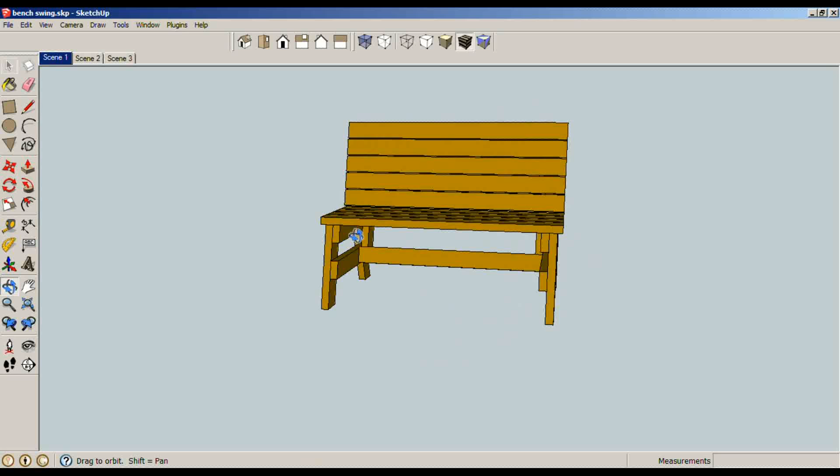Alright, this is the bench that I've been making for several years now, and it's a 48-inch bench, and I've always wanted to make this into some type of porch swing. I really like the angled legs. I don't really care for straight legs or straight arms. I really like the angled look, and 15 degrees is perfect for me.

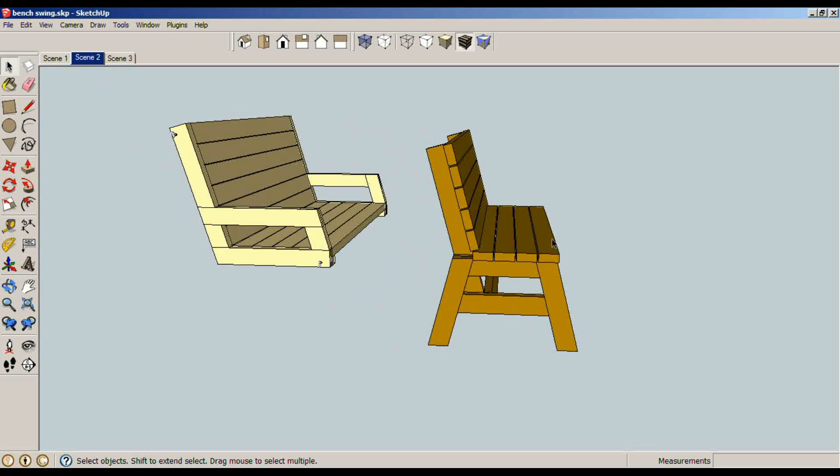So recently I was asked to make a swing, and I figured it'd be a great time to do so. So this is what I've come up with. It keeps the same 15-degree theme going. I've added an extra slat in both the front and also the top, and of course I've got 4 eye bolts to suspend this from the porch.

It's all half-lap construction, and it should be a very quick, very easy, very budget-friendly project. So stick around and I'll show you how I made this in SketchUp.

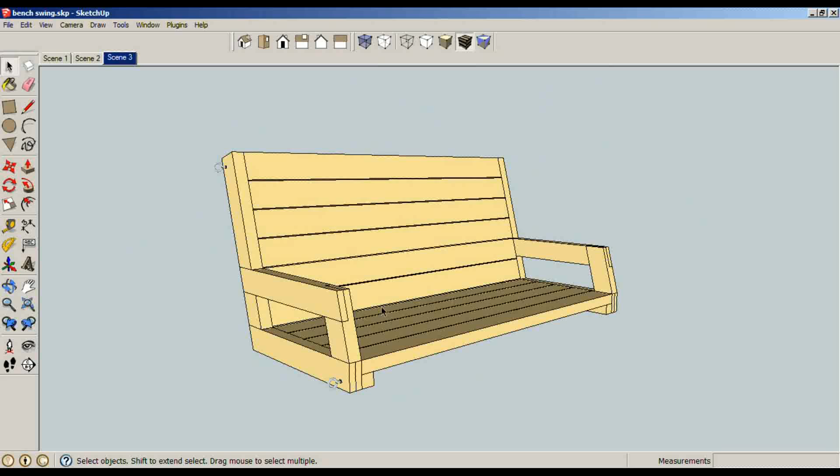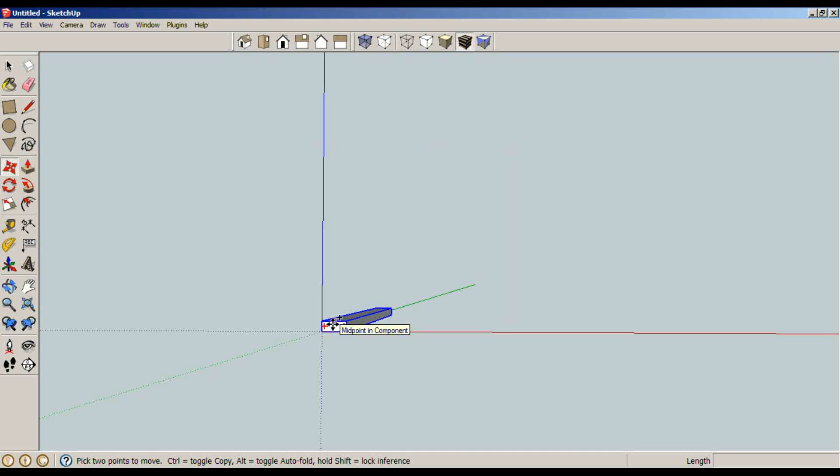Alright, I'm going to start this project with the slats. So R for rectangle from the origin, and I'm going to go 3.5 by 1.5 for a standard 2x4. P for push pull, this direction 48 inches. Space bar, triple click. G for component, enter. M for move, Control brings up your plus sign, and I'm going to go from this corner along the red axis 3.625. That allows the 3.5 inches plus 1/8 of an inch spacing. And I'm going to press X 4, enter, which duplicates this copy times 4.

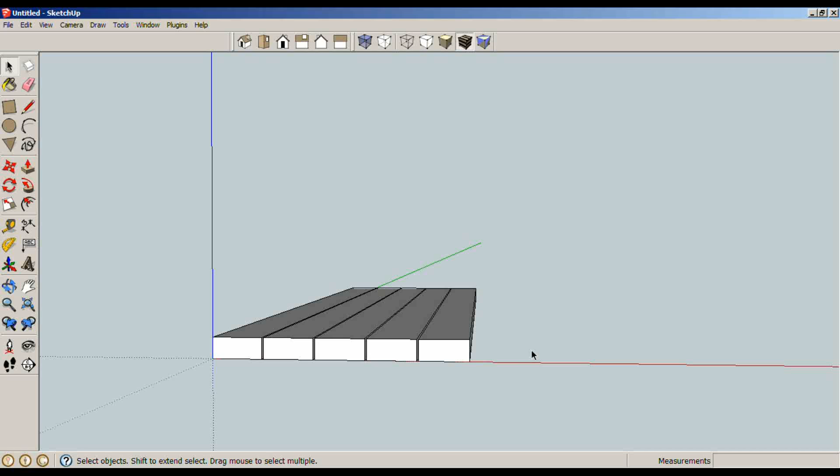Now I want to make another set of slats going up the back, so let's just first select everything, rotate from this point, this direction, 105 degrees, but I'm going to press Control to bring up the addition sign. M for move, from down here to this point, and let's see, I need to move these 1/8 of an inch this way so I have a nice spacing in between. So let's go with T for tape measure, and across one of these edges I can drop a guideline which will allow me to move along that guideline

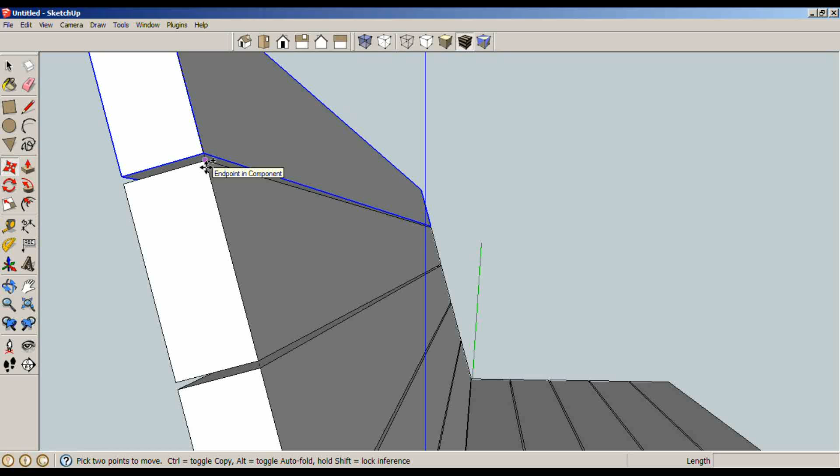0.125. I actually want to add one more slat up here, so I'm going to select it, M for move, Control brings up your addition sign, and I want to snap from this point over here. That way I keep the spacing already there. There we go. I'm going to have 6 slats on back and 5 on bottom.

So now I can build the arm, and what I'm going to do is basically use the T for tape measure to make a couple guidelines and just draw from there. So the arm pieces are going to be 3 inches wide, and let's see, I need a guide here and then go down 3 inches right there. I'm going to take both of these, M for move, Control brings up copy, both of these guides over here, grab one of these, M for move, Control brings up copy, and I'm going to go 3 plus a 4-inch spacing, so I need to go up here 7 inches.

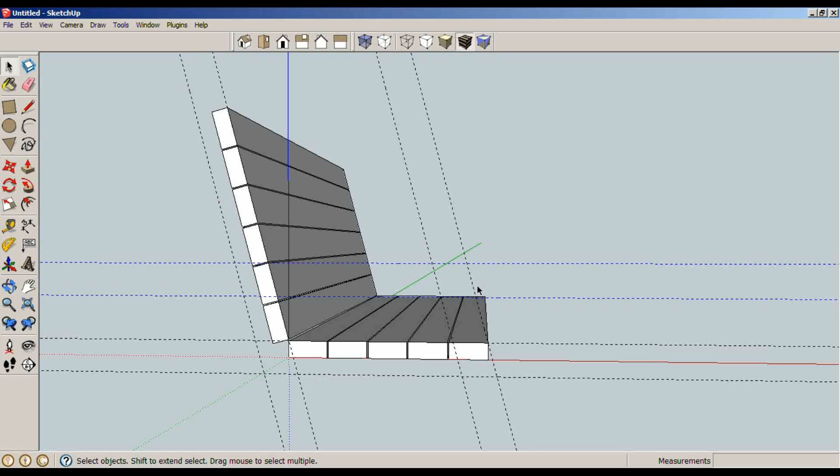Now this just outlined everything that I'm going to do, so I can use my L command to just draw in everything. This horizontal piece on bottom is just going to be flush right here. P for push pull, this direction, distance of 1.5. That's the standard thickness of a 2x4. Space bar, triple click, G for component, enter. L for line, let's draw another one right here. P for push pull, this direction, and I've already got my distance here. Space bar, triple click, G for component, enter.

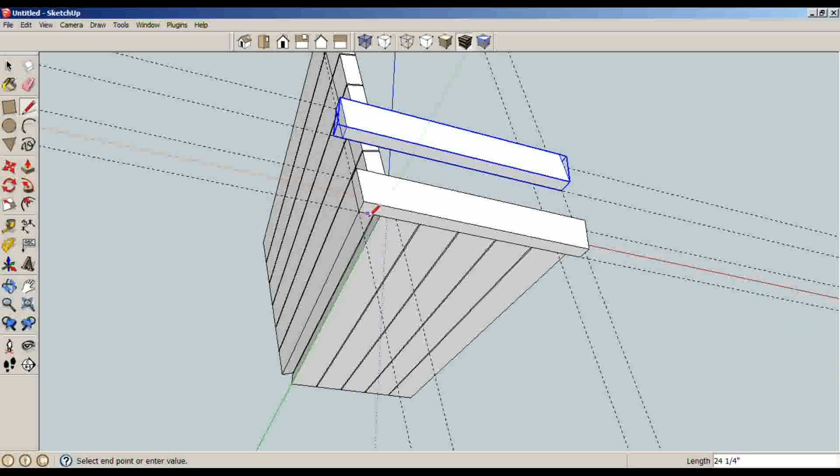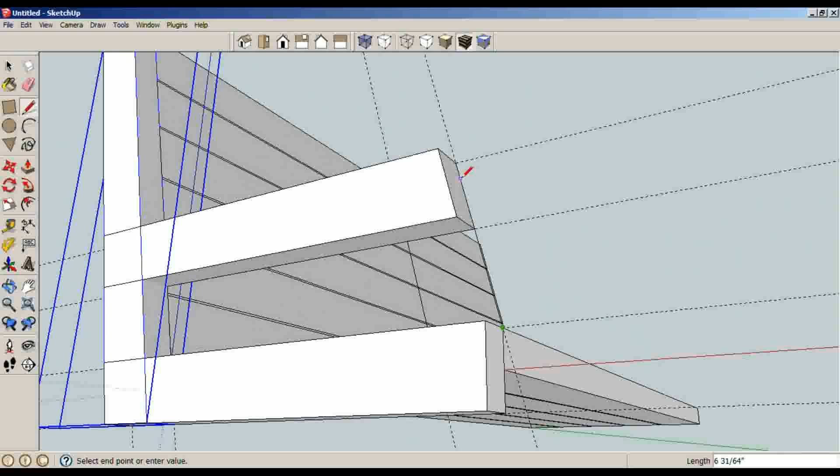L for line over here to here, just connecting some dots. P for push pull, this direction right there, spacebar, triple click, G for component, enter. L for line, and this one's going to be a little bit funny shaped. P for push pull, right there. Spacebar, triple click, G for component, enter. Now that's the arms. I just need to cut out for the half lap, so I can delete my guides.

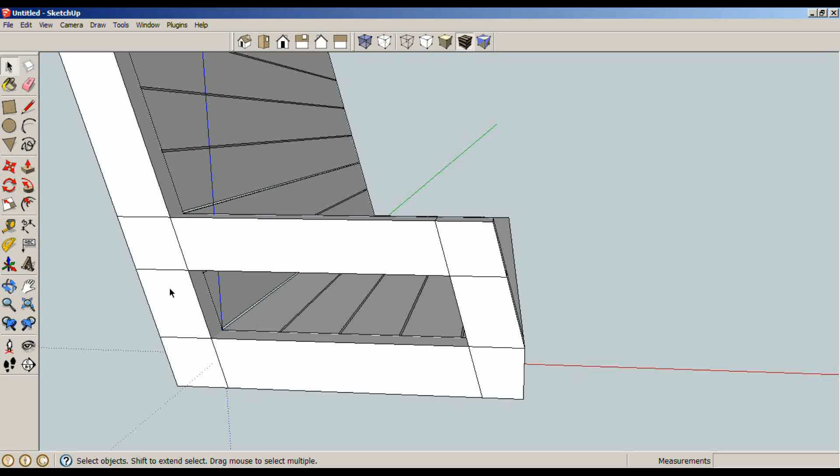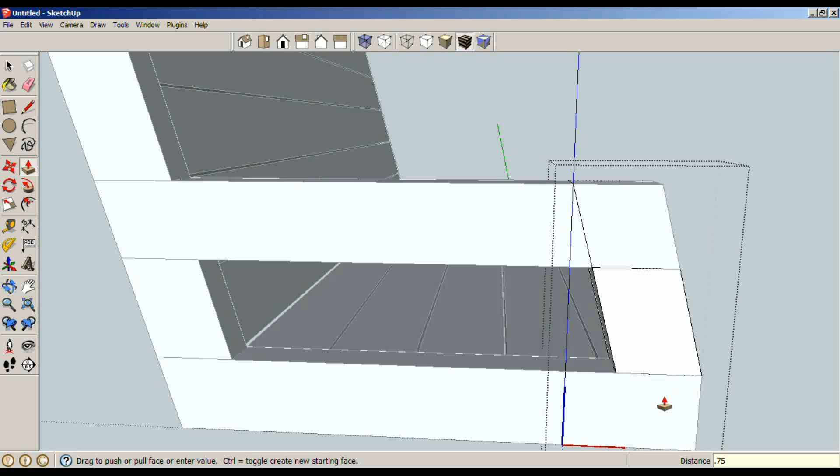And which pieces do we want to show up on the half lap? I want to see the horizontal pieces on the outside of the swing. So let's first remove the vertical pieces. So double click, and we can use L for line to just draw in these half laps using the horizontal pieces as reference. P for push pull, we're going to go in 0.75 inches, enter, in 0.75 inches, enter. Get out of that part, over here, L for line, P for push pull, whoops, P for push pull in 0.75 inches, in 0.75 inches, spacebar.

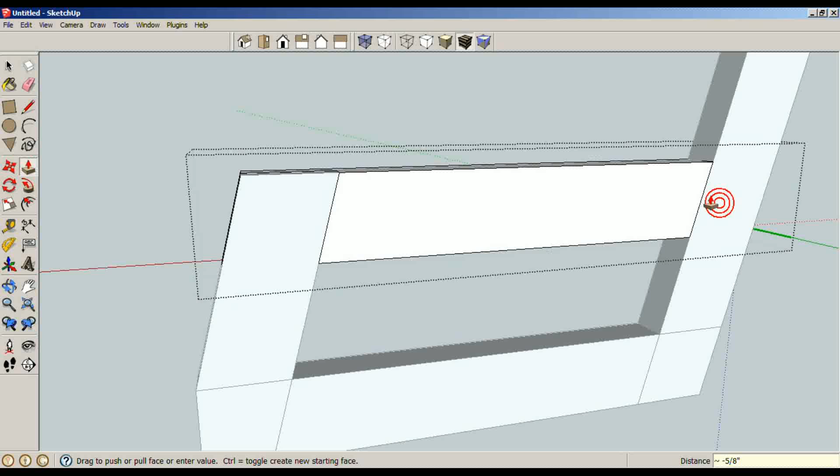Alright, now I'm going to hide the rest of this so I can see the inside. Now we pushed in the verticals on the other side, so now we need to push in the horizontals. L for line, tracing out our guides real quick, P for push pull in 0.75 inches, push this in 0.75 inches, same thing on bottom, a little bit of repetition here. L for line and trace out our little guides here, P for push pull, whoops, I wasn't in my part.

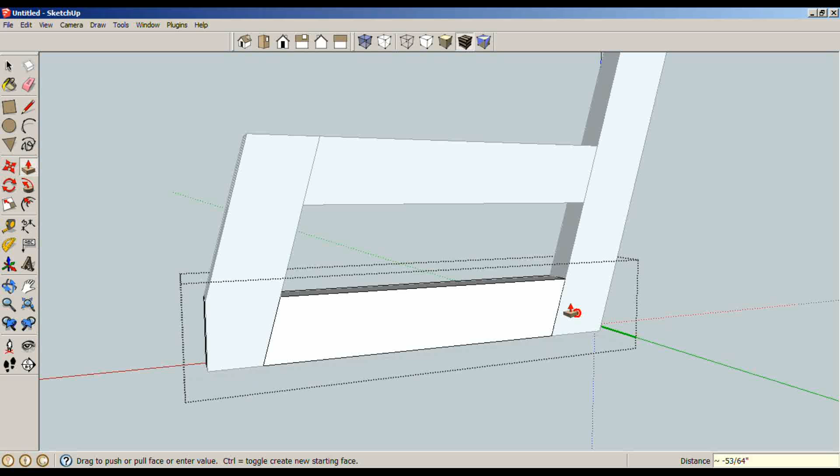There we go, L for line. P for push pull in 0.75 inches, push it in 0.75 inches, spacebar, get out of that, and now we have some nice half lap joints, as you can see.

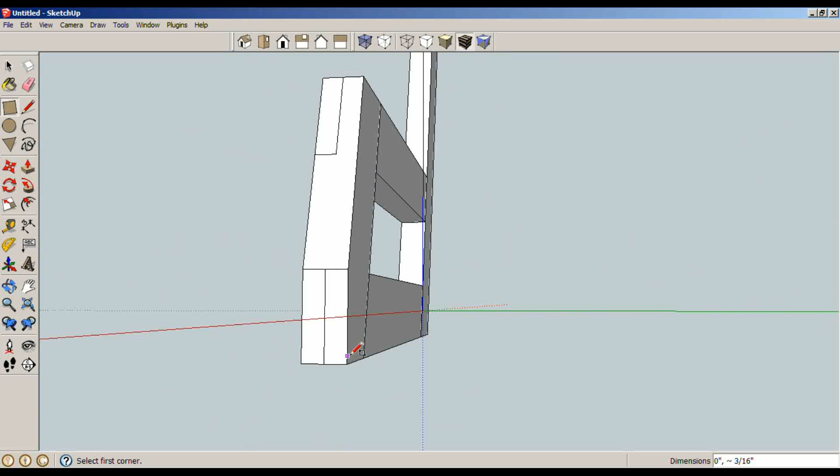Alright, so the slats need something to rest up against, and for that I'm just going to R for rectangle and make a 2x2 that I can just screw to the bottom. So 1.5 by 1.5, enter, P for push pull, and I want to go this direction. I'm not sure where I want to stop as of yet because I want to connect it to the other one, so let's just stop it right there and don't make it a component yet.

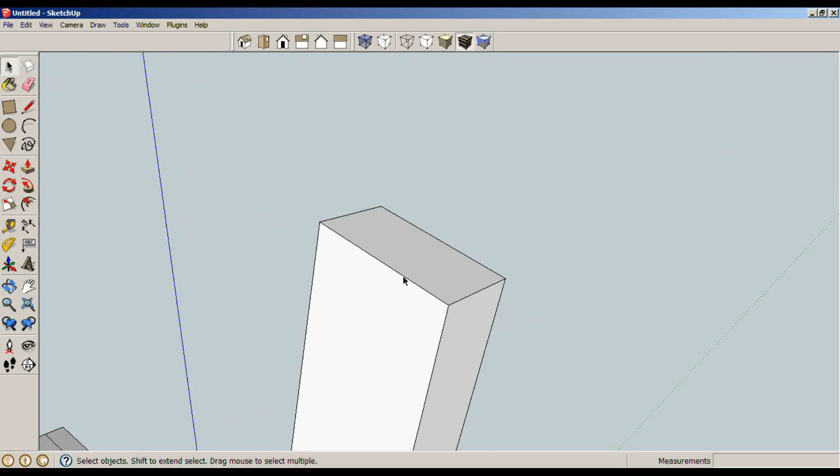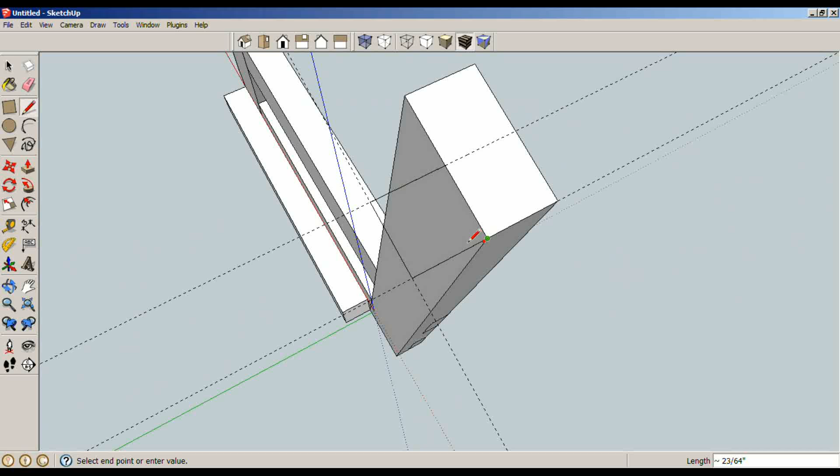So now we need to go down this way with a 2x2, and this is an angled face as far as the origin of the drawing, so I'm going to use my T for tape measure and go 1.5 this way, and along this face 1.5, and then also right here. So now I've got a little rectangle I can trace out with the L command. There we go. Let's delete these little guides real quick.

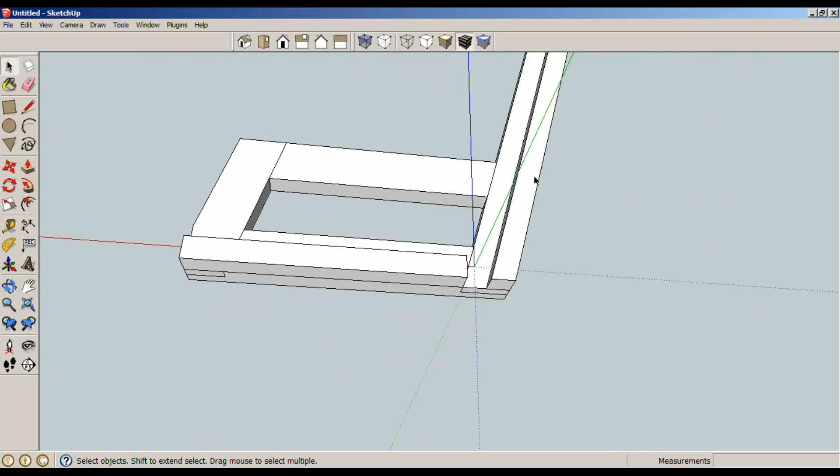P for push pull, and I'm actually going to back up, P for push pull, there we go. Actually going to go further than the piece and use the L for line command to just chop it off right at the bottom. Now I have a good mounting location for the back slats. Triple click, G for component, enter.

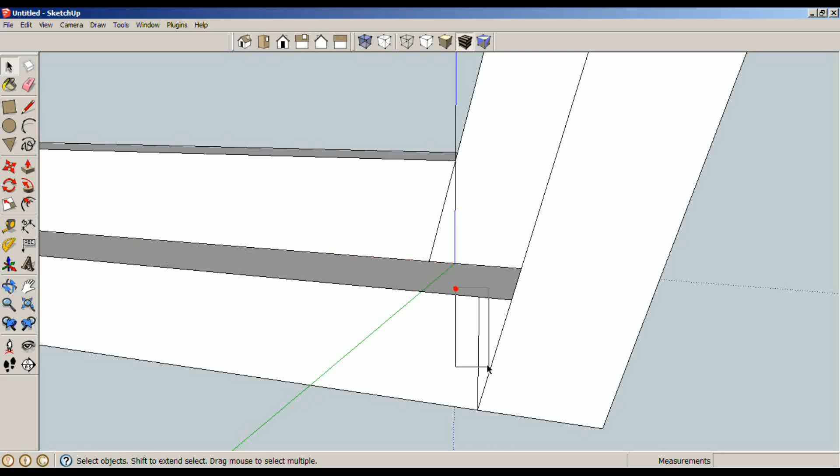Now we never made this one a component, so we can still P for push pull this face to this point, L for line, whoops, too far, L for line, connect the dots here, P for push pull, we're going to push it all the way back to this edge. Now we can delete that line. There's another line inside the part that I should delete, but no one can see it, so I'm not going to.

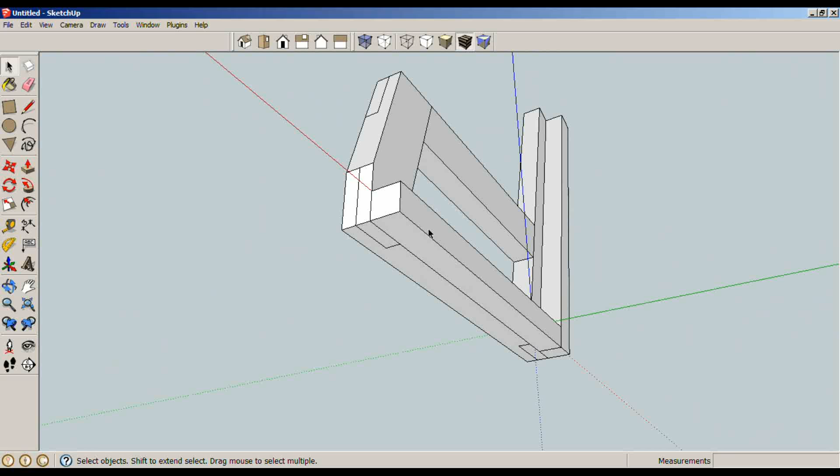Triple click rather, G for component, enter, and now we have a mounting location for the seat slats. All my seat slats and back slats are going to be secured from the bottom, so there's no screw heads on top, and these are just going to be screwed in and glued as well. So now let's edit, unhide all. Let's unhide our slats, and they fit in just as planned.

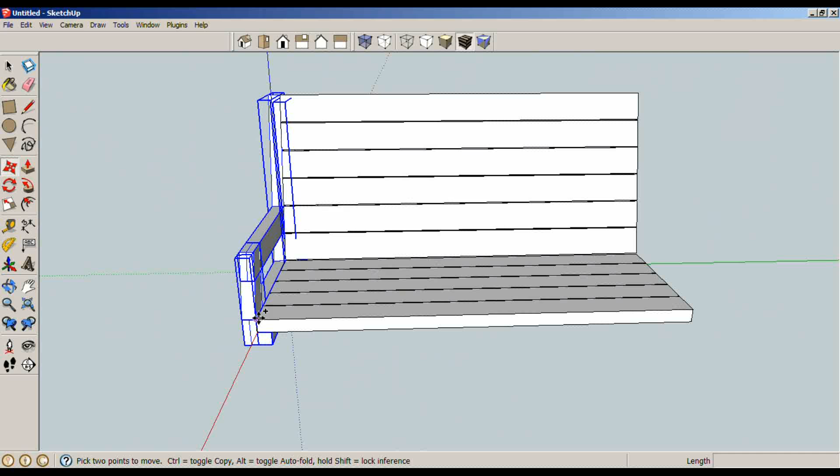So we can use a window to select just the arm assembly rather. M for move, control brings up your plus sign, come over here, and we dragged it across the green axis. It is in the wrong orientation, so let's flip it along the green direction. And that's pretty much it.

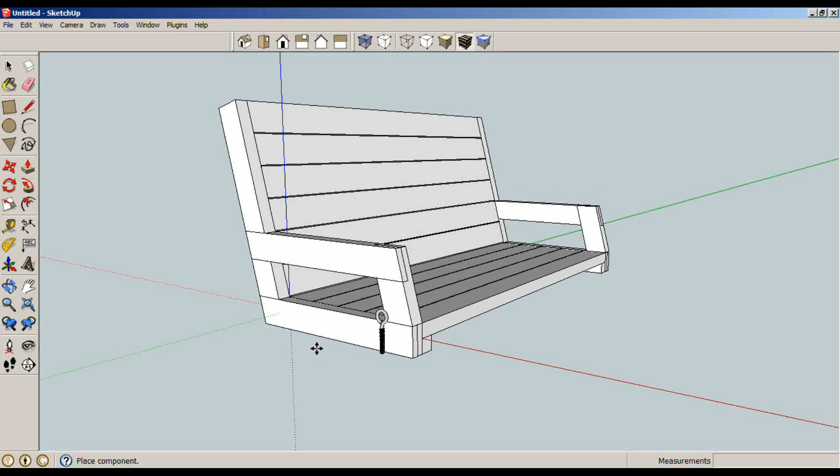There's not much else to this, although I do want to put in the eye bolts real quick. So let's go to File, Import, and I've already downloaded an eye bolt off the internet, so I can just open this and drop it in my part. Now let's rotate this so that it is in the correct orientation. Let's go like so, and let's go like so. M for move, I'm just going to grab it on the piece somewhere, and drop it like that.

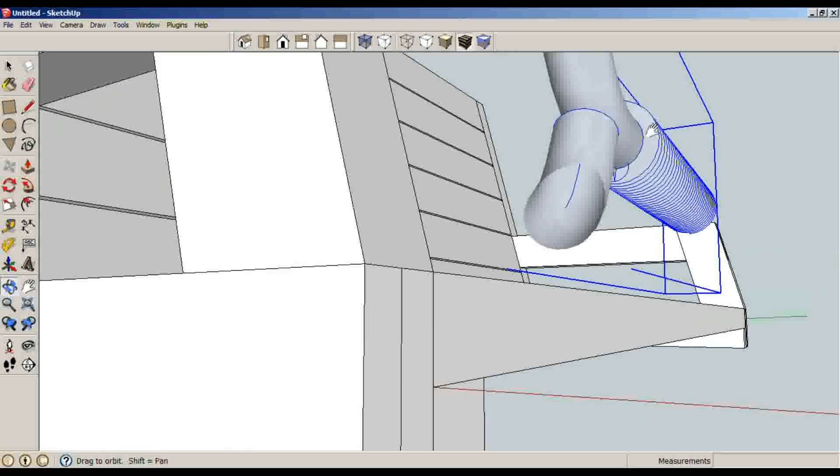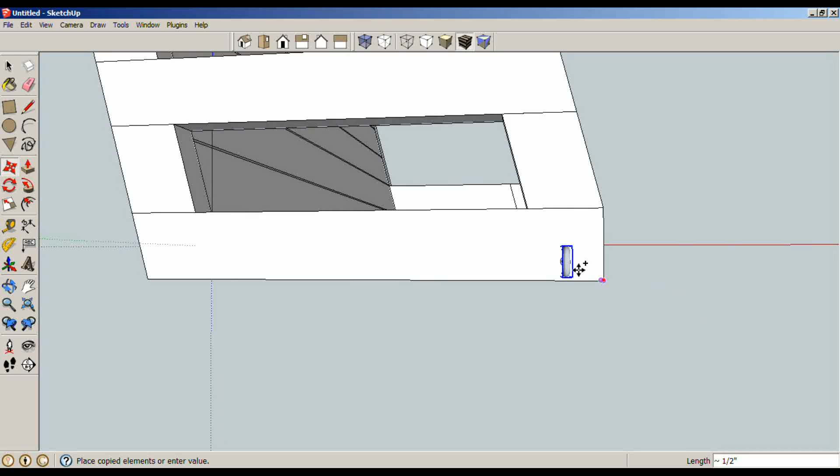Now when I put this into the swing, I want to go through the arm assembly and through this 2x. So let's go something like that, and then from this direction let's center it on the front arm piece here. M for move, control brings up copy, and I can copy another one up here somewhere, something like that. And looking down this 2x2, I can move it along this direction so that it is going through the back support into this 2x2. Now we've got this side complete.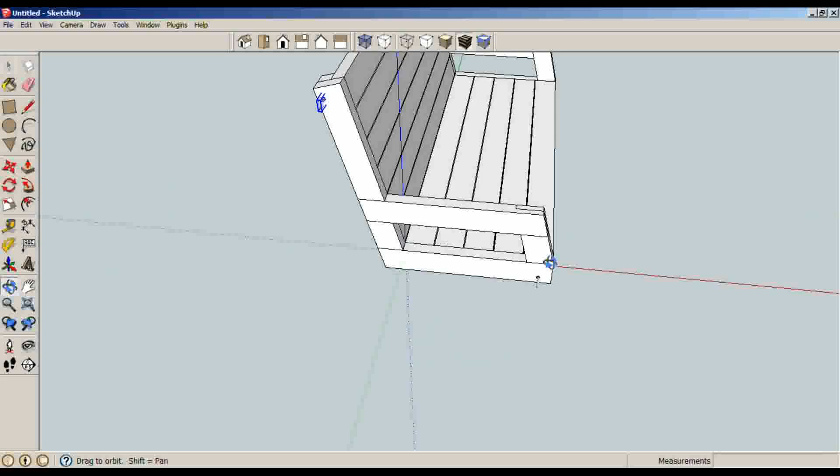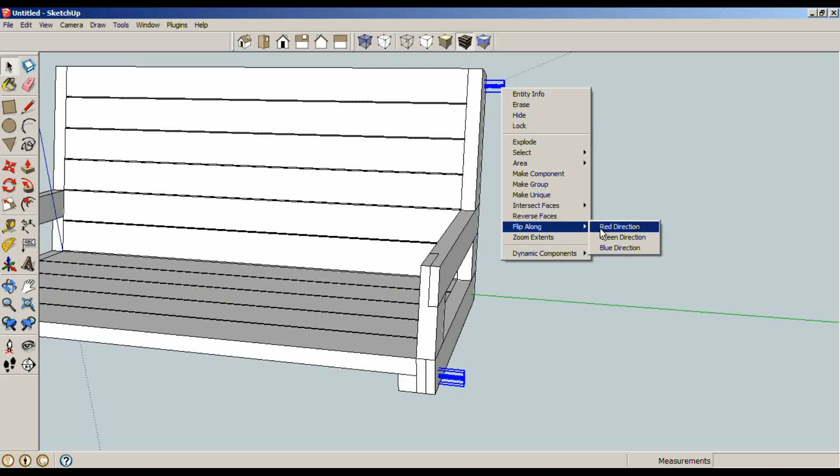We can control select both of these. M for move, control brings up the plus sign and go from this outside point to that outside point. We moved it along the green axis so we can, whoops, I deselected those, I didn't mean to. Select that, control select that, right click, flip along, green direction. Now they're a little bit too far out, so let's move them in, yeah, something like that, that works.

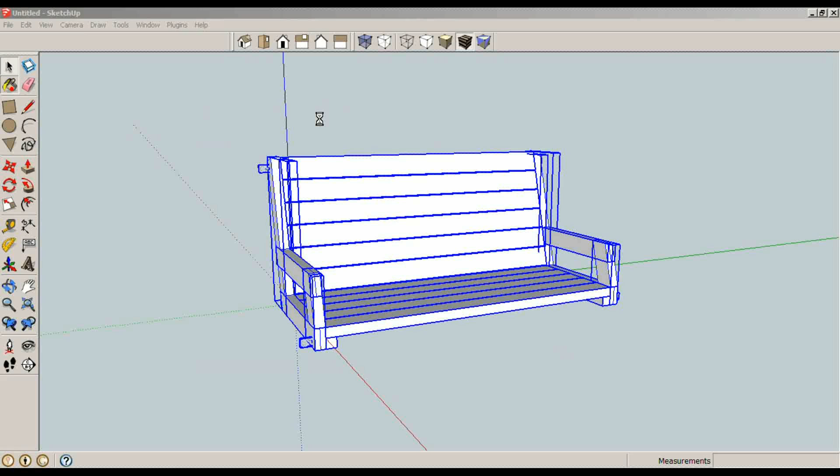So there we go. The inexpensive, easy to make porch swing. So let's make this yellow real quick. Something like that. There it is. Very quick, very easy porch swing.